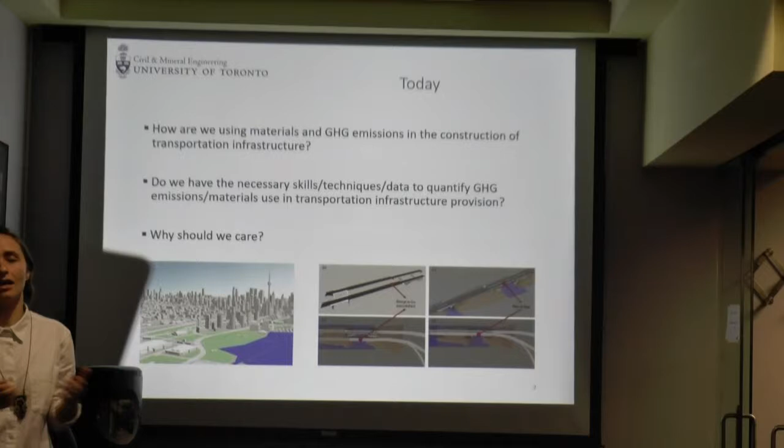I'll answer it in a useful way. And then at the end, in case it wasn't obvious through the presentation, I'll go over why should we care, and especially why should you care as transportation engineers.

Your computer is blocking the screen a little bit. Down, there you go, yes. Okay, I'm a little bit worried about dropping your computer off the edge of the table.

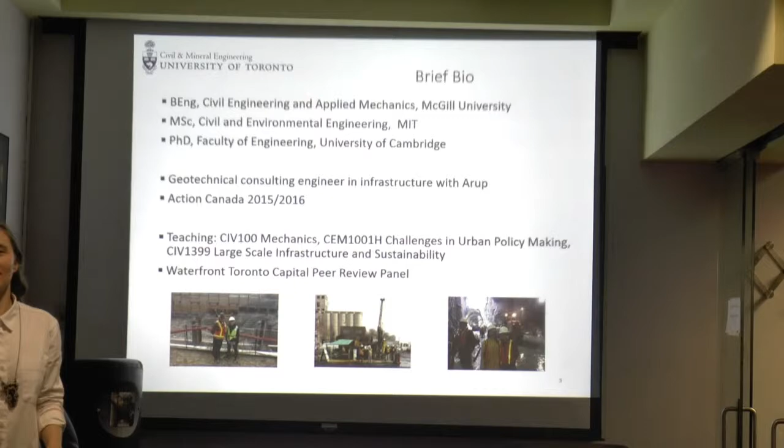So for those of you who don't know me, like Laura said, I'm a professor here in civil and mineral engineering, and I'm not a transportation engineer. I'm a geotechnical engineer by training, and then later in my career I got into sustainability. When they were hiring me for this job, they said, 'Are you a transportation engineer? Because we have enough of those and we don't want any more.' And I'm not a transportation engineer. I could not run a 4-step model. It would not be useful for that.

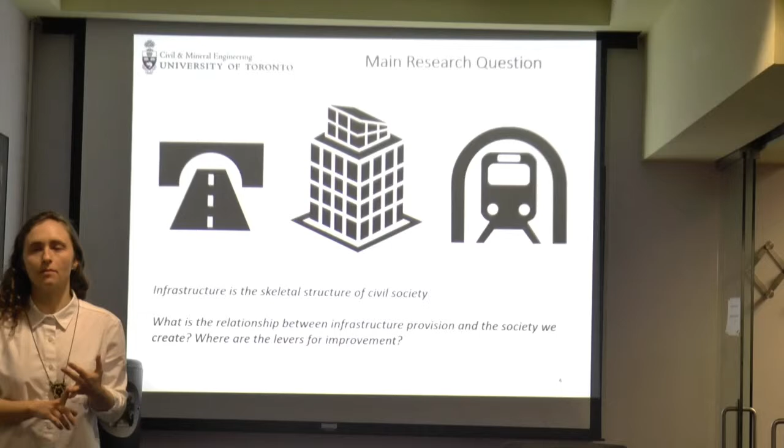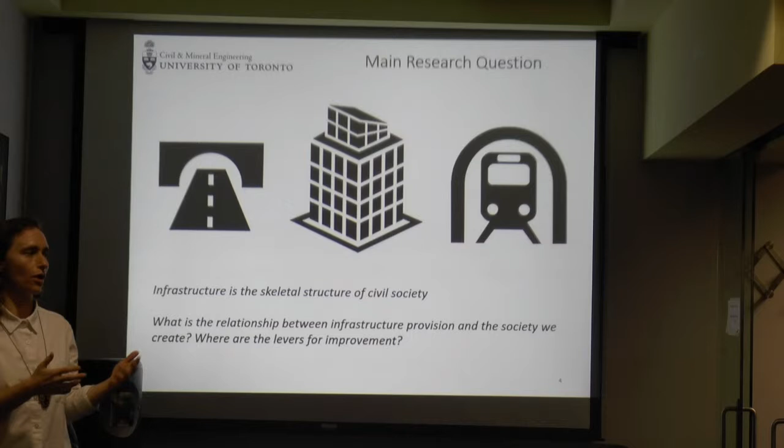But I do a lot of work on transportation infrastructure, because transportation infrastructure is the structure that we put the whole rest of civil society on top of. That leads to my big research question: given that our infrastructure systems are the skeleton of our society, are we planning, building, operating, and maintaining them in a way that aligns with our long-term goals? If we have a goal to reduce greenhouse gas emissions by 80% by 2050, are we building our infrastructure system in a way that gets us there? If we have a goal about equitable access to mobility or accessibility for all of our populace, are we building our infrastructure systems in a way that helps us get there?

Overall in my research, I take an inductive, bottom-up approach, which means I try to gather a bunch of data and learn from what the data tells me to build a larger theory structured on top of that data about the way our infrastructure system works. This means a lot of my research deals with case studies - very specific accounts of what happened in a general case - and then working from there to build bigger theories on top of it.

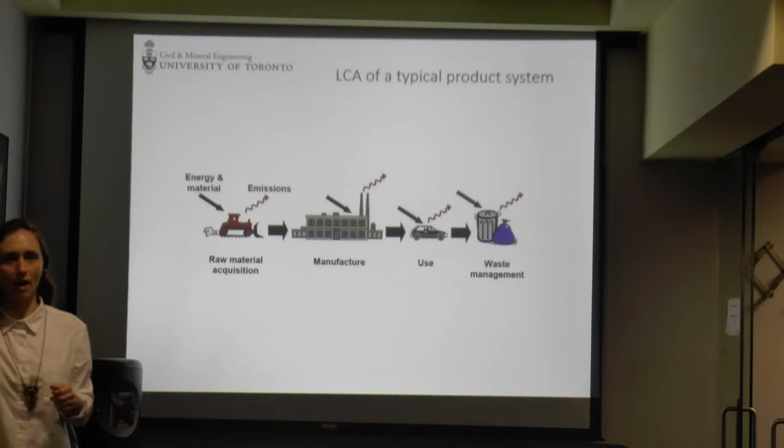I'm going to give you a brief primer on LCA. I know some of you have taken the LCA class here, and for many people it's very familiar, but for others it might be less familiar.

Life cycle assessment is a tool, a thought process for how to think about the overall environmental impact of a product system. One of the main reasons we take into account the full life cycle is so that we don't have burden shifting.

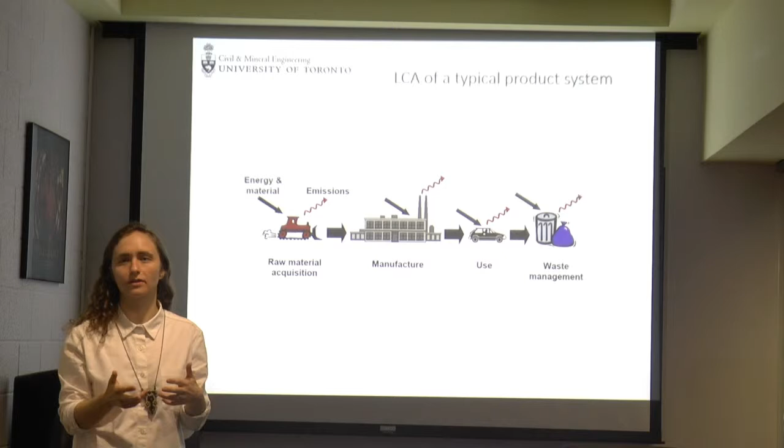If you think about natural gas, for instance, you've probably heard that it's fairly low in greenhouse gas emissions when you burn it. But there are lots of processes involved in getting the natural gas out of the ground that can release a lot of methane and have a lot of environmental impacts. So when you take a life cycle assessment, you look at getting it out of the ground as well as burning it, and you come up with a slightly different perception of that fuel than if you had just looked at the operation phase.

So this is what life cycle assessment is working to get us to do. It has 4 main stages: getting the raw materials, manufacturing it into a product, using the product, and then disposing of the product at the end of its life.

Life cycle assessment in North America can be traced back to consumer products. It started with Coca-Cola: is it better to have plastic Coca-Cola or glass Coca-Cola? If you look into the impact of the materials and the shipping overall, you have to take into account the weight. You come up with different ideas about what's best depending on which life cycles you include and which ones you don't.

This has been expanded over time to bigger and bigger systems, all the way since the 70s, but a lot in the last 20 years, has been used for built environment products like buildings. And when you're looking at a building, you're looking at slightly different life cycles.

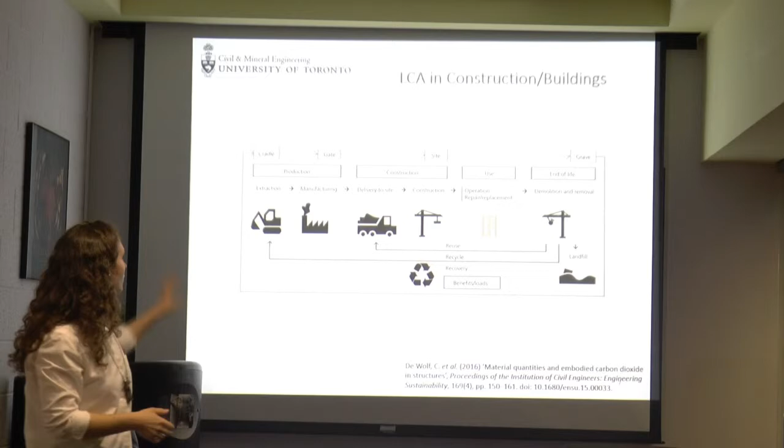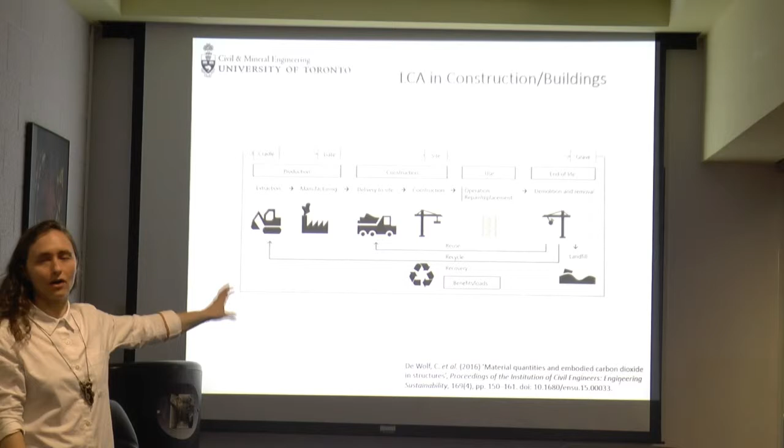You have extraction and manufacturing, you have delivery to site and construction on site, which is sort of more manufacturing even once you pass the original manufacturing materials. Then you have operation, repair, and replacement, because buildings have 20, 50, or if you live in Europe, 400-year lifespans. And then how do you get rid of the building at the end of its lifespan? This is the way people have been thinking about built environment LCA for a long time.

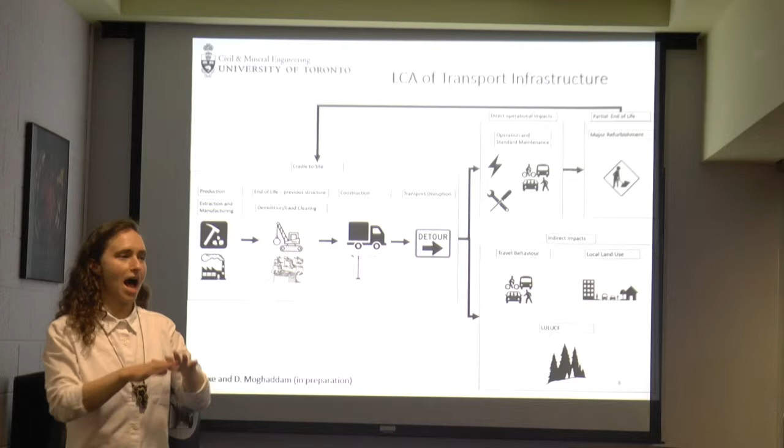But when we start to think about transportation life cycles, because of that nature of transportation as the baseline on which we build society, and also because the nature of transportation projects is really, really big...

Even a massive building is not going to have an influence much larger than a couple blocks around it. A transportation system can go all the way through a city, it can go between cities, you can have a highway that goes for hundreds, if not thousands of kilometers, and so the scale of impact we're having is a lot larger. And so we have the impact of the whole construction, so we have to get the materials out of the ground, we have to clear wherever we want to build the transportation infrastructure, and we have to deal with all the transportation disruption while we're building the infrastructure.

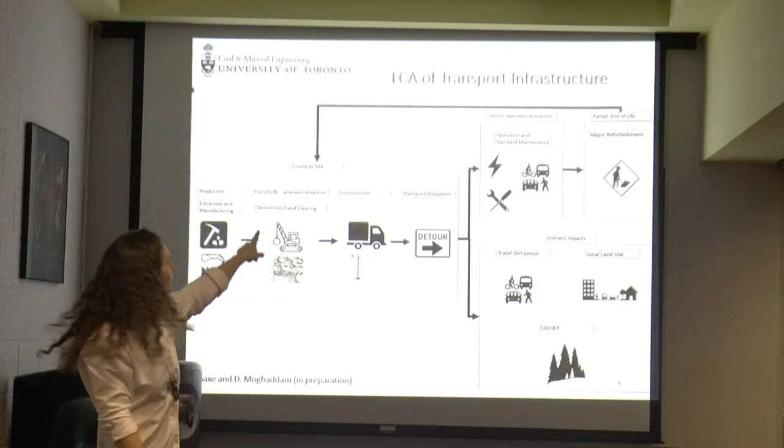And then you go up to the things we tend to think about the most often in the little box over here. You have to operate the infrastructure, you've got to make sure the roads stay smooth, you've got to keep the trains running, you've got to run the cars and the trains. And then at the same time, you have all of the important indirect or induced impacts of induced demand on travel behavior, transport land use connections, the way in which our transport system influences or not the protection of natural land.

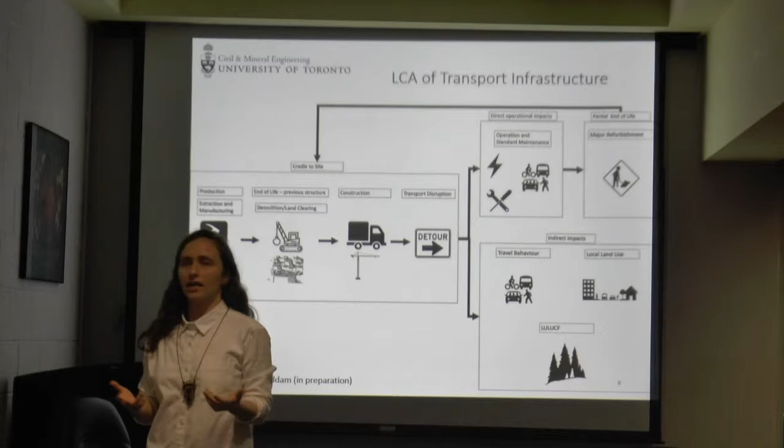And then eventually you get to a sort of end of life where we start taking our transportation system apart in major ways, but mostly to rebuild it, right? The oldest metro systems in the world are still running. Roman roads, we still use them, right? The major roads in Toronto have been here since the beginning. We don't tend to end of life our transportation infrastructure, so it doesn't fit into the LCA framework in the same way as many other consumer products.

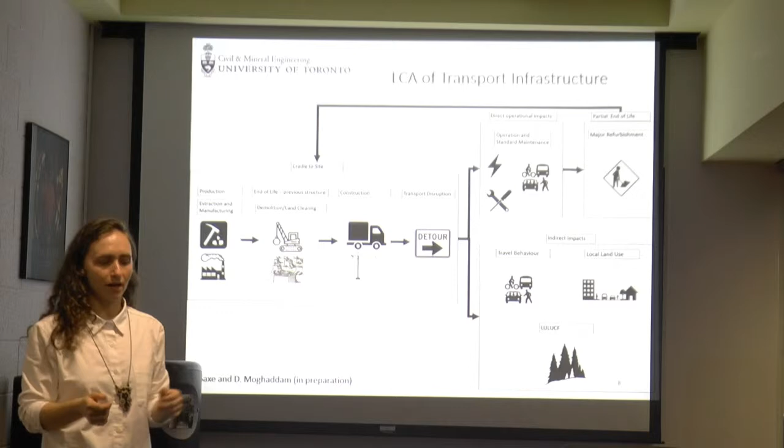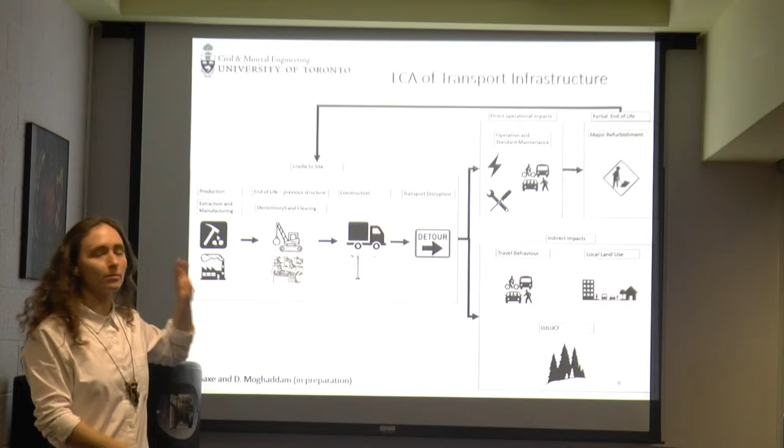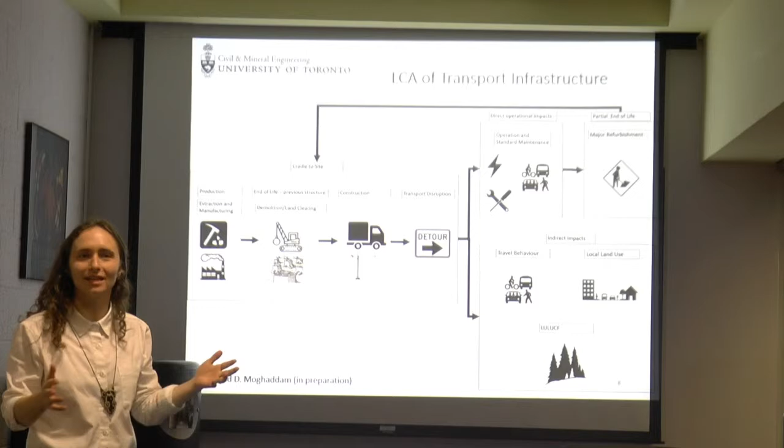And so most of what I'm going to be talking about today is in this space, in part because this space and some of this space is pretty well covered by transportation engineering. But I think it's important that transportation engineers and all of us as we think about planning our infrastructure system have a better ability to think about the whole space as we work towards long-term goals like accessibility for all, not melting the planet, and basic things that we're working towards.

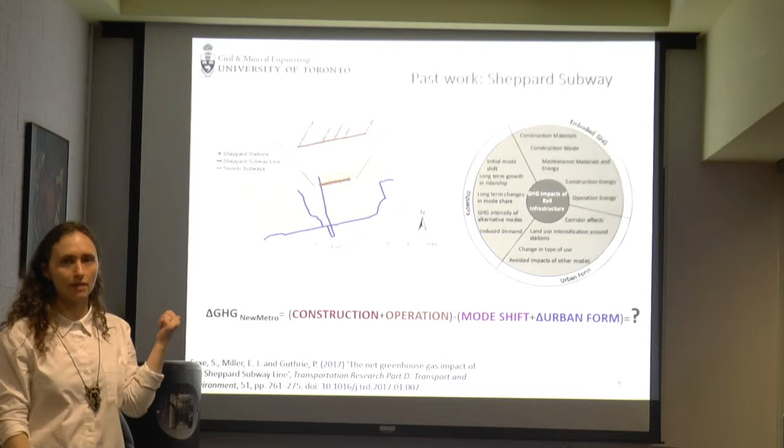So some of you will have seen this before, especially if you were here 4 years ago when I gave my last presentation in the seminar. And so in my past work, I've tried to pick off pieces of this bigger problem and think about what the overall impact is of our infrastructure, in this case, particularly on greenhouse gas emissions. So this is work that came out of my PhD looking at what's the net greenhouse gas emission of the Sheppard subway. And for that, I looked at what it took to build the subway, but also its impact on long-term travel behavior and its impact on land use change.

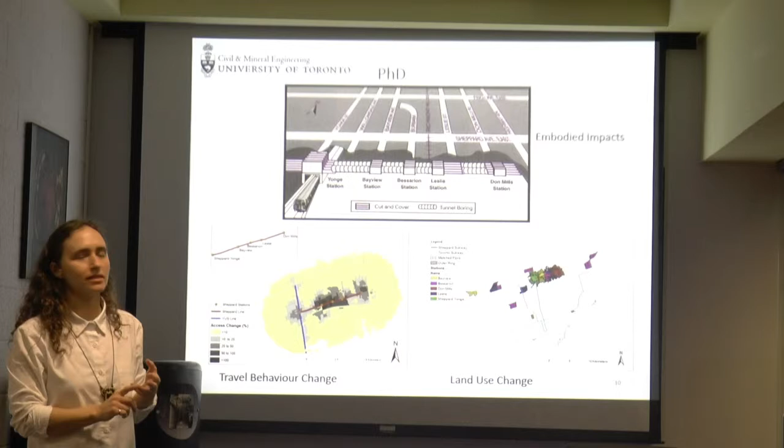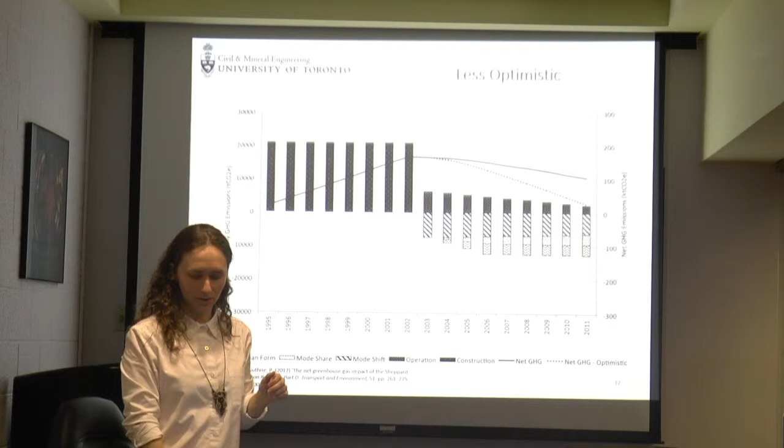And when we put them all together, I found that overall, you get a big buildup of greenhouse gas emissions during construction, and then you start to recover emissions as people change travel behavior and as land use changes over time. But this was taking the optimistic approach. This was taking a less optimistic approach to induced demand and land use change, and this was taking the least optimistic approach. And if we want to make decisions about how to build infrastructure and what we should be doing with it, this range of it pays back in 12 years to it never pays back is too big. This work, I think, was useful for bringing up questions, but on actual guidelines and numbers, the ranges were all over the place, and you could make a reasonable argument in either direction.

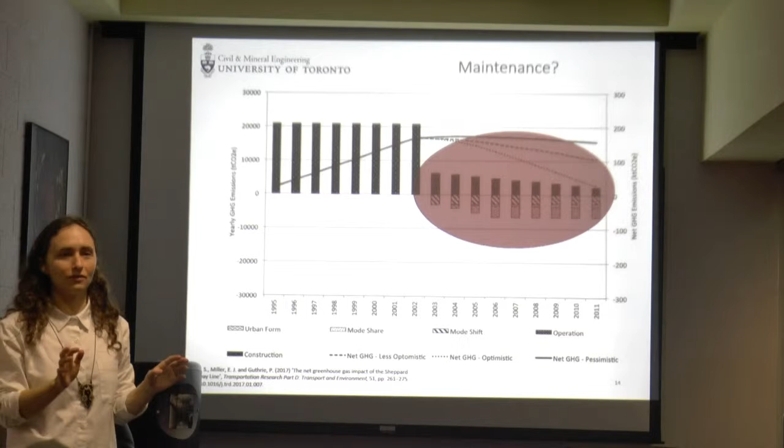So in the time since then, I've been looking at, well, which parts of this data were really weak? And one of the things that you'll see over here is there was no maintenance impact on the infrastructure. I believed in my earlier work that once you build the infrastructure, it keeps going forever without needing any further inputs. What you're seeing there is the impact of electricity, and the reason it goes down is because the change in electricity mix in Ontario over that time.

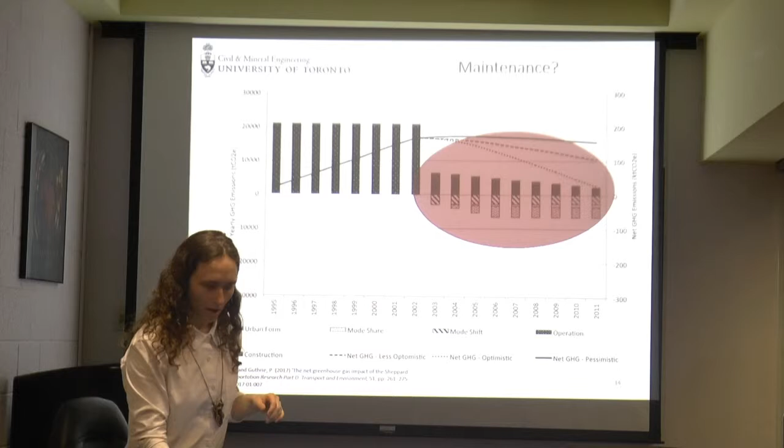And then another big thing that was missing from our understanding was what exactly was going on in the construction phase. It's a big part of the emissions. It has the major impact on our payback, because if it's bigger, we have more to pay back. If it's smaller, we have less to pay back. But the data that was available in our understanding at the time I was doing my PhD was pretty thin. In part because most of this data is proprietary, and because of the nature of the construction industry, it tends to be held by many different people. And so getting even a basic number like how much concrete did we put in this building or how much concrete did we put in the subway is actually surprisingly difficult.

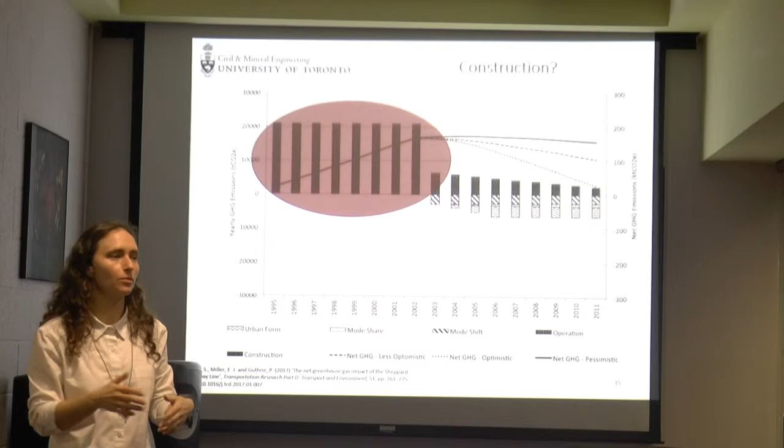So going forward, we started to ask a couple other questions, and one of them was, do we have enough information about the rail network as a whole, or the way in which we build rail infrastructure, to get an understanding of what the greenhouse gas impact of rail infrastructure is so that we can use this in planning?

And when I started to do this work, I really thought the answer was going to be yes. It had been about a decade since some of the key seminal work in this space. A lot of people have been talking about it. I'd contributed to it. I felt we were getting fairly to the end.

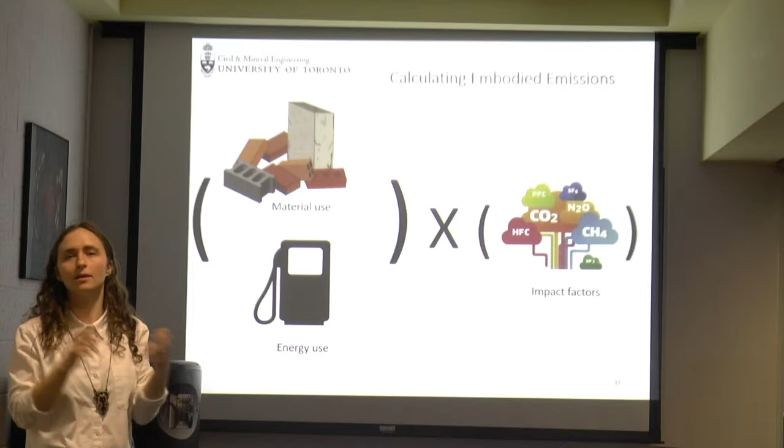So one of the things that we need to do to calculate the embodied emissions of building infrastructure, and this is the cradle to place part, it's the part of the life cycle that's just until the infrastructure opens and we start using it, was we need to know how much materials are involved, we need to know how much fuel is involved, and we need to know what the intensity of that fuel or materials are. Like, what's the impact for the environment of using 1 meter cubed of concrete?

And so in some early research, when I first started here, we picked off, well, let's look at the maintenance. That was one of the two things that were missing. We know we use a lot of materials in maintenance, or at least we think we probably do, and it hadn't been factored into most of the work that had gone into the life cycle.

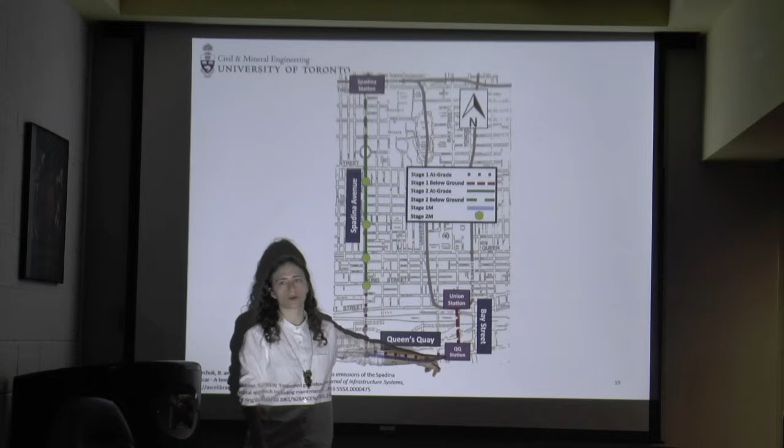And so we picked up the Spadina streetcar as a case study, and started looking at the development of the Spadina streetcar over time. And so we now know the Spadina streetcar as it goes from Union Station, it comes out of Queens Quay, comes out from underground, so this part's underground, comes across the waterfront, and then goes up and goes underground again to go into Spadina Station.

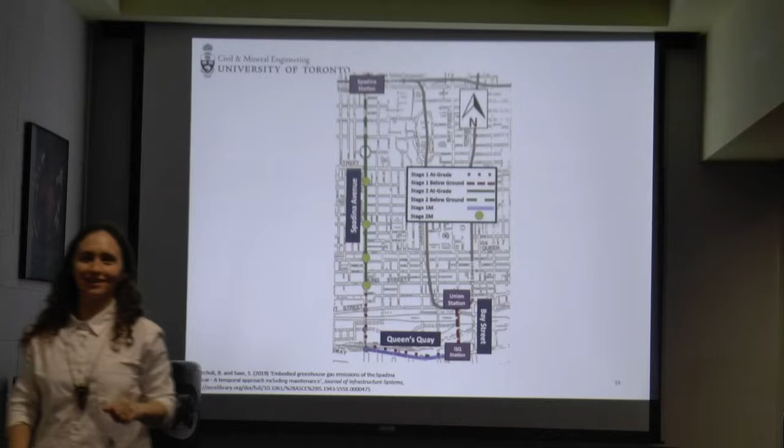Somebody poke Matt, he's struggling. Jet lag. I believe you.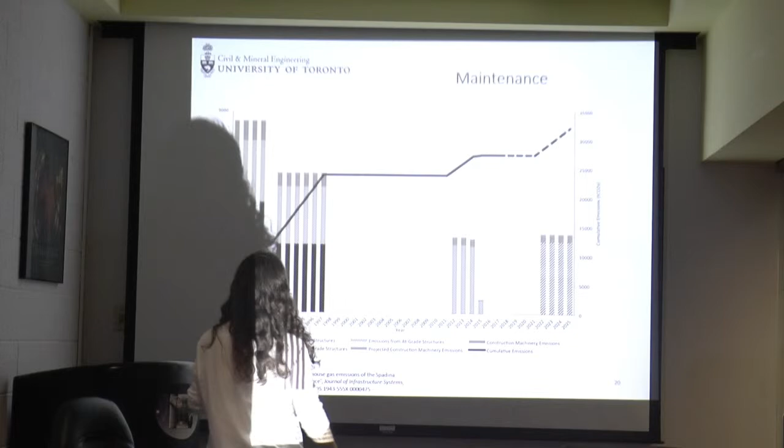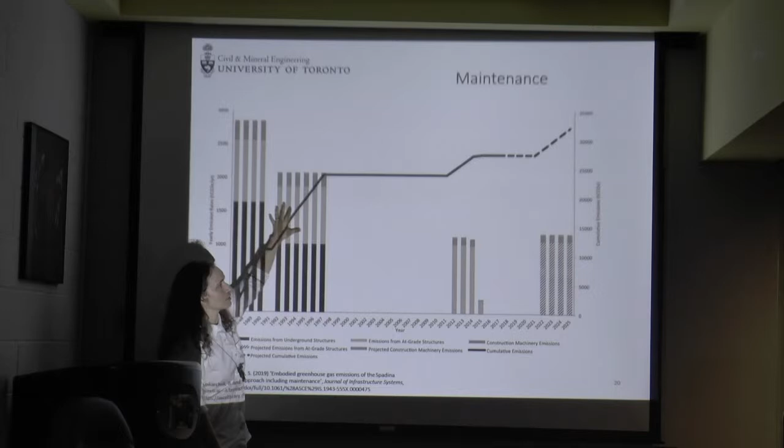And so we started to look at, well, how had the greenhouse gas emissions built up over time through the various stages of construction, and what had maintenance had to do with it. And so this is what we found overall. We're seeing here in black the underground sections. We didn't find any evidence of underground maintenance, but we found a lot of evidence for the gray sections, which is the above ground. So this was the original construction, and then this was maintenance later.

And what we found is that the above ground sections of Spadina have been built twice. And that's kind of surprising. The line hasn't been around for that long. It started construction in the late 80s. But the entire line by the end of our case study will have been built twice, and this is just major maintenance. So what does that do for the environmental payback of that line?

Well, if it took 20 years for it to pay back the first time, and then we built it again, and it takes another 20 years, it means we're going to struggle to benefit from the potential savings of the system itself. And so why was this taking so long? Well, there were a couple things. When they first built the Spadina line, they wanted to close the road as little as possible. And so they built it really quickly, which had a durability impact.

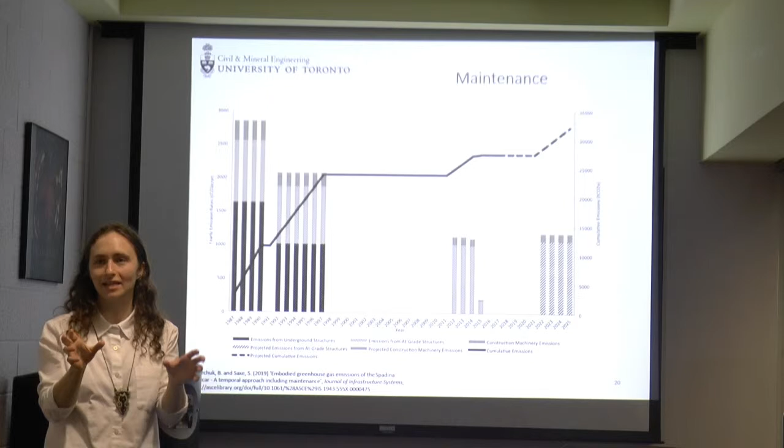So when they went to do maintenance, they thought they were only going to have to maintain the top concrete layer, where vibrations from the streetcar had basically meant that the rail lines were not properly encased in the concrete anymore. They thought they were just going to have to do the top. They found they had to do the full depth, which required both a lot more time in the construction or rehab process when they had to redo it, but also a lot more materials.

And so there's a lesson here about if we're going to do it, let's take the time to do it right, and that's hard. Nobody likes it when roads are shut down. Nobody likes it when transport is out of service. But there had been a challenge the first time around because of doing it quickly that had long-term impacts.

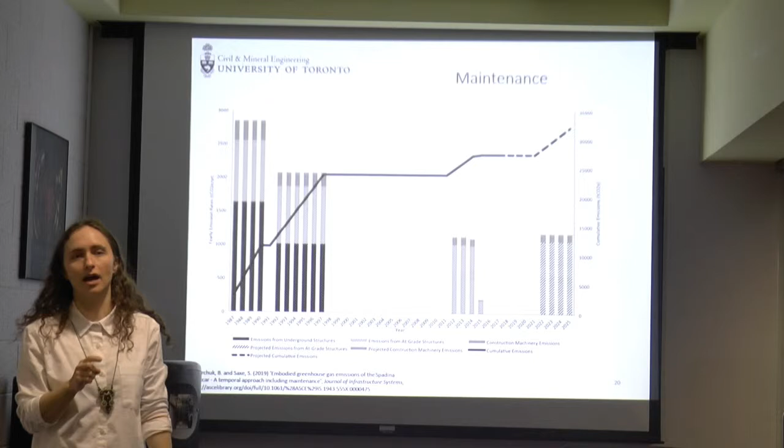One thing I'm going to say right now is I do my research on rail infrastructure because I like rail infrastructure. This applies much, much worse and much more to roads. So nobody should come out of this with a message that rail infrastructure is bad and we shouldn't do it.

It's just a framework for thinking about infrastructure. Roads require a huge amount of maintenance as well, and they have all of the cars that go on them. Okay. So going back to rail, we've taken a little bit of a look at maintenance. Now let's look at all of the literature that had been done in the rail space.

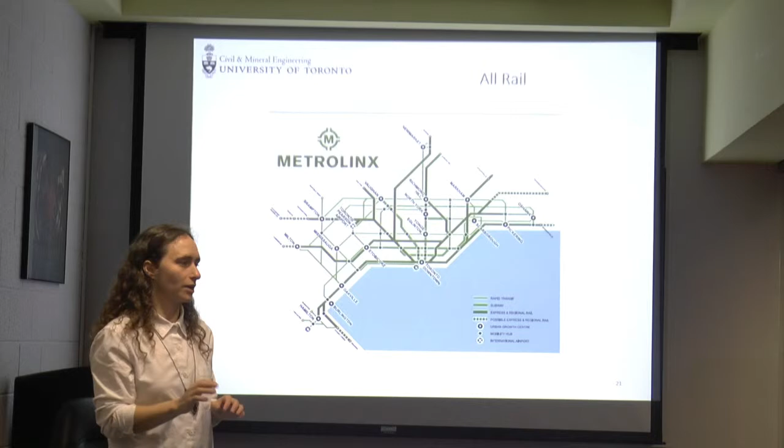We started doing a lit review of all of the literature that had looked at the embodied emissions of rail of all types, of light rail, of heavy rail, of metro rail. And we had a couple of research questions going in. One was, where in the world has this research been done? There was a lot of conversation going on, but it was a little bit unclear from the way we were all talking, is this pertinent to everywhere in the world, or is it all just coming from California?

What were the main factors influencing the greenhouse gas emissions of our rail infrastructure? Are they things that we can control in planning or control in design? How quickly is our infrastructure paying back its greenhouse gas emissions? And do we know enough from what's already existing that we could make useful models for planning in the future?

But the other questions were a little bit harder to answer. When we started looking, we found that while there had been 23 papers in this space, most of them had only looked at embodied emissions as part of what they were doing. There were only 4 papers that had made embodied emissions their main focus. And as we all know from when you do papers, if you're doing 6 different things at once, you do each of them with a little bit less detail than if you were only focusing on one thing. So there was a lot less detail out there than we had originally expected.

And everybody had done this in different ways. People had taken different boundaries, they had taken different life cycle assessment approaches, they had done it at different stages of construction. And so there was a huge amount of diversity within the data set, and much more than certainly I expected going in.

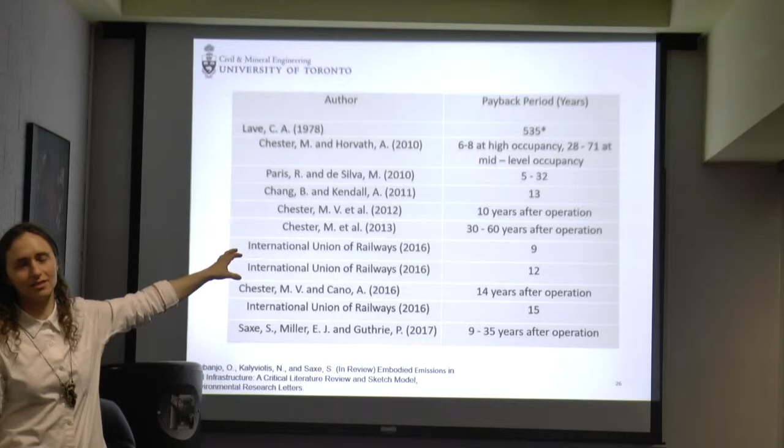When we took a look at payback periods, again, there was a pretty big range. The one at the top from the 70s should be discounted because it was a completely different energy system at the time. And what we were finding in general is that most people were finding it takes decades to pay back the upfront cost of building rail infrastructure, meaning there is space as we build and plan to reduce the material and greenhouse gas investment so that we can get better long-term payback.

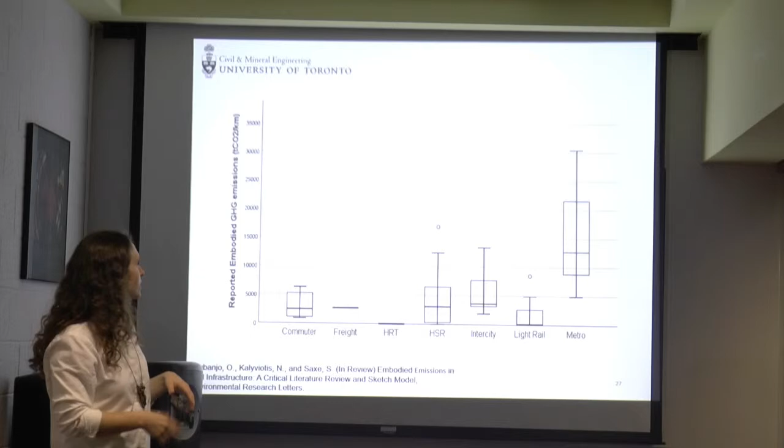And did we have enough information to make a sketch tool? Could we say, if you're choosing light rail versus heavy rail, this is how much greenhouse gas emissions you should plan per kilometer? What we found is that there was a very, very large range in the published work. As you can see, for metro rail, it ranges from 5,000 greenhouse gas emissions per kilometer to 30,000.

So you can say, okay, well, this is a huge range, maybe not that useful, but one of the things to notice is that light rail, intercity rail, metro rail are not necessarily descriptors of the type of infrastructure you run on them. They're a label that we give to our infrastructure, and sometimes they tell us a lot about the rail gauge or maybe about the vehicle itself. But are you building at grade, are you building in a tunnel? That wasn't included in these names.

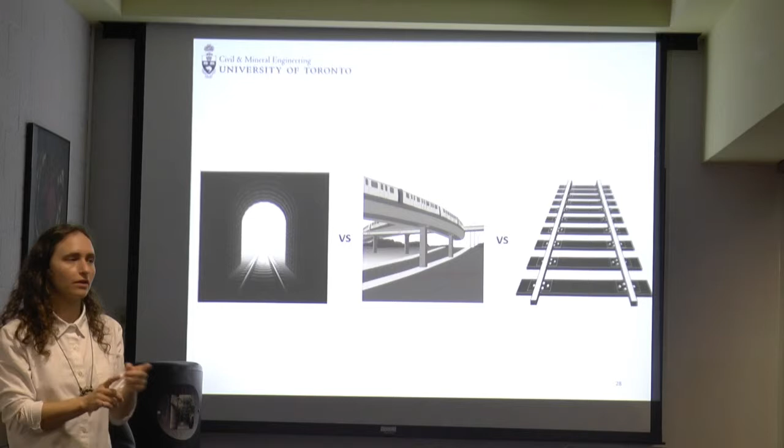So if we backed off and put all of the infrastructure, whether it's called light rail or heavy rail or high-speed rail, into the same pile, and looked at the need for tunneling versus at-grade versus elevated structures, could we reduce some of the variance on all of these data? And what we found was that, in general, tunneling is about 27 times more greenhouse gas intensive than building at grade. And for elevated structures, there's less data, but about 6 times as much.

And if we use that to normalize the emissions, you find a much smaller range of emissions for each type of rail. And it led us to, for an equivalent at-grade kilometer, you could make a sketch tool that said it was a little bit under 1,000 tons of CO2 per kilometer, if you look at everything all in.

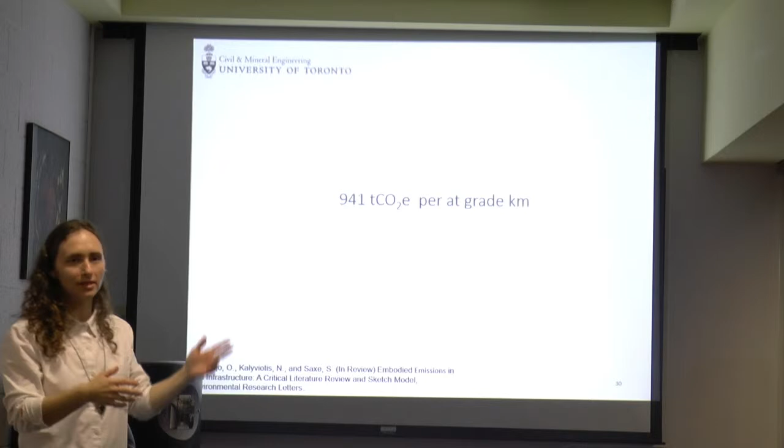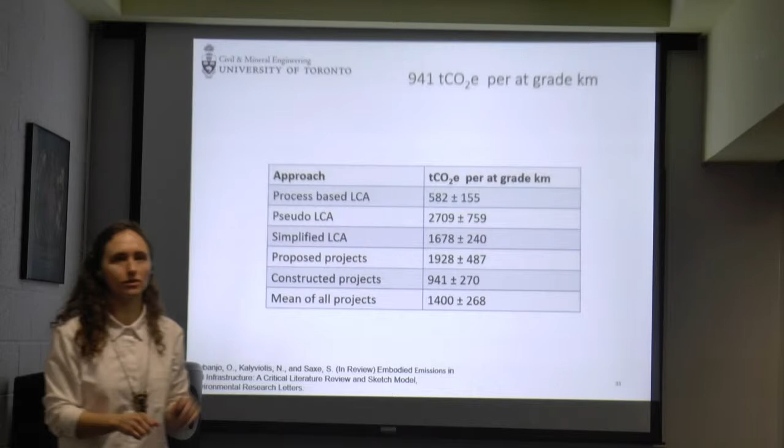So we can say, okay, great, we've come up with a sketch tool. You should normalize per at-grade kilometer, multiply by 27 times if it's going to be a tunnel, multiply by 6 times if it's going to be elevated. But to add a little caution, when we grouped on various other parts of the infrastructure, for instance, whether the project was already constructed or planned, there were huge variations in the numbers. So the 941 should definitely be taken with a grain of salt.

So we'll go back to the original research questions, were we able to answer them? So, where in the world? We know most of it is coming from Europe and from North America. So if we're looking at other places, we should probably put some effort into understanding if those places have meaningful construction differences from Europe and North America.

And what are the published payback periods? It looks like we're looking at a decade to decades. Do we have enough information yet to use this in planning? I would say we have enough information for a very sketchy sketch tool, but not enough for detailed planning. One of the things the field needs going forward is a lot more standardization, but also a lot more data from the people who build these systems and plan these systems to allow for better studying and more detailed outcomes.

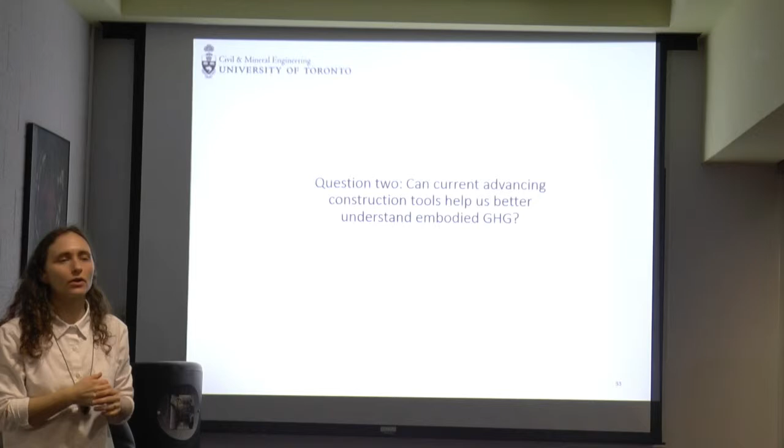And so the next thing I wanted to ask was, okay, it's kind of hard to figure out what's embodied in a construction system. There are challenges with data, there are challenges with boundaries. And there has been challenge with data in this field since the field has existed. It was a challenge for my PhD, it was a challenge for all of the people who came before me, and it's been a challenge in my work my whole career. But there are increasing digitized tools and modern approaches to construction, and maybe we could take a different approach to collecting the data, and it might be easier to get it all together.

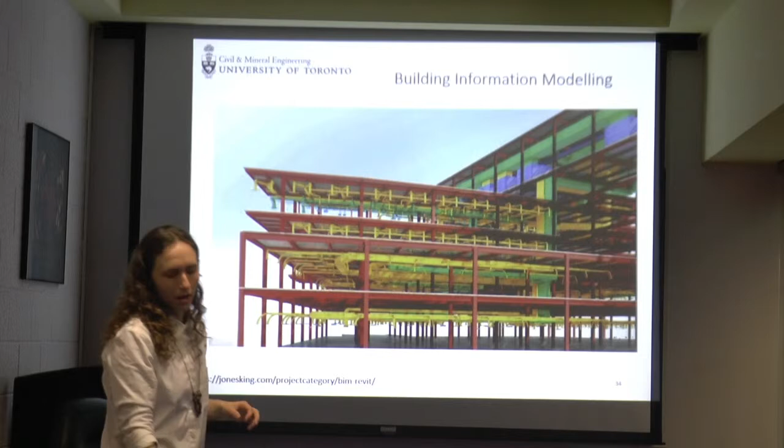One of the things that's becoming bigger and bigger in construction is the use of building information modeling, which is 3D models that represent all of the components that will go into a building and are usually labeled by material. So if you looked at this drawing, the red, which is the steel, would usually be labeled steel with all of its details. The yellow, which looks to me like the plumbing system, would usually be labeled with all of the material details. And so inside a building information model, you can usually just press a button and it gives you all of the material quantities inside the virtual construction you have just made.

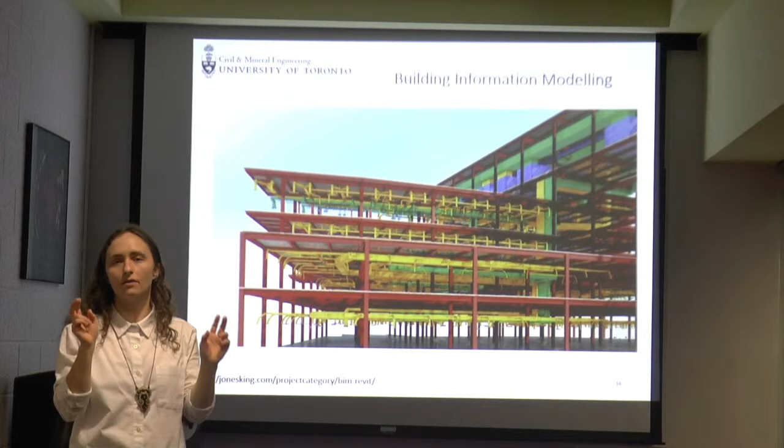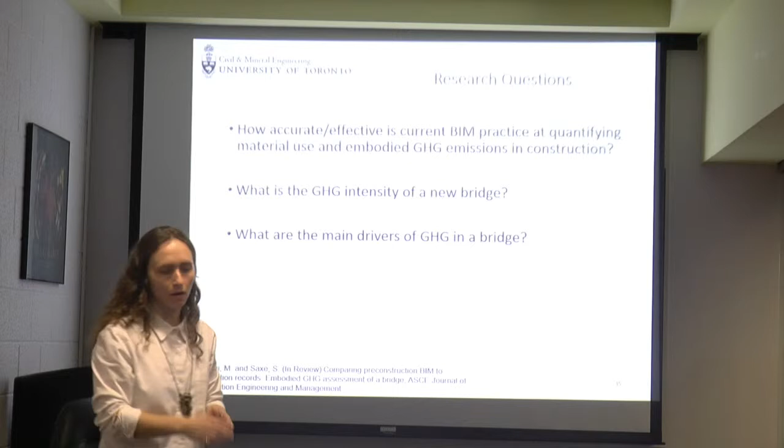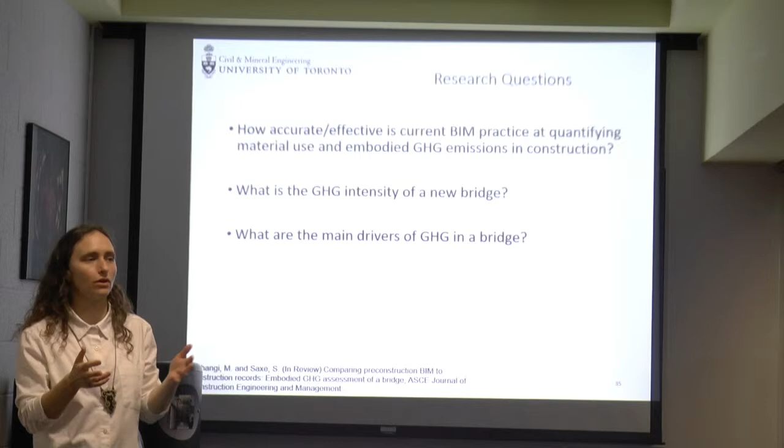And that could be a great way to have a better approach for getting all of the data we need anywhere there is a building information model. So we took another case study, in this case a bridge, and we had a BIM model from before it was built, and also a bunch of details from the construction site of actually measuring how much concrete was used on that site, how much steel was used, how much asphalt was used. And we wanted to take a look and see, between these two sets of data, are we going to get the same information? Is the BIM model as good as having the information from on site, and could it replace the complicated, challenging, proprietary needs to collect all of this data by hand?

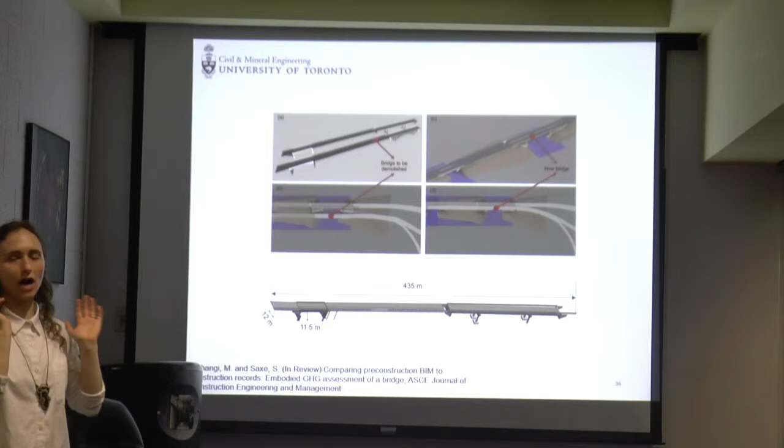When we took a look at a bridge in Ontario, it was originally 2 lanes of traffic that went over 2 bridges and then had an island and went over 2 other bridges. The plan was, between the 2 bridges, to build a new bridge, refurbish one of the original bridges, and take down one of the original lanes. So there were 2 new bridges and 2 bridge refurbishments in the project, and overall it was about 0.5 kilometer long. This is what the Navisworks figures looked like, which was the building information model we were using.

So we looked at the work in 4 different stages. First, just using the BIM as a base case. Second, adjusting the things that were modeled in the BIM to their on-site quantities. So structural steel is modeled in the BIM, but steel reinforcing is not. Some elements, like construction energy, are not modeled in the BIM at all. So first we wanted to adjust the quantities themselves, then add in the impacts of things not included, like rebar in the BIM, and then, in the fourth case, tested the sensitivity of this approach for calculating greenhouse gas emissions to assumed or preliminary intensities assumed for concrete. If we assume concrete has 10 greenhouse gas emissions in it, we know there's a big range in the way concrete is manufactured, and so we needed to test the sensitivity of that 10.

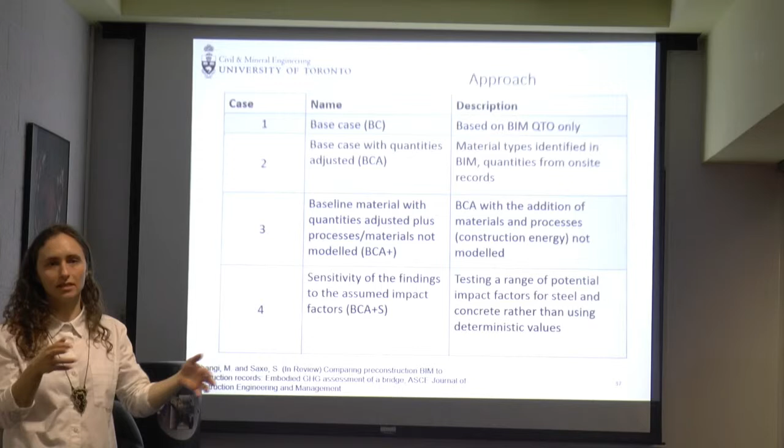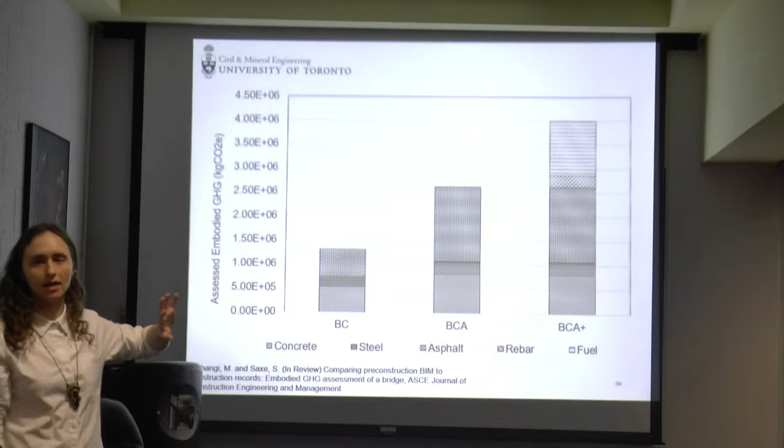These are the range of results we came up with for the first three cases. The BC case is the base case. If we had just done a greenhouse gas accounting based on the BIM, we would have come up with about 1.25 on that scale.

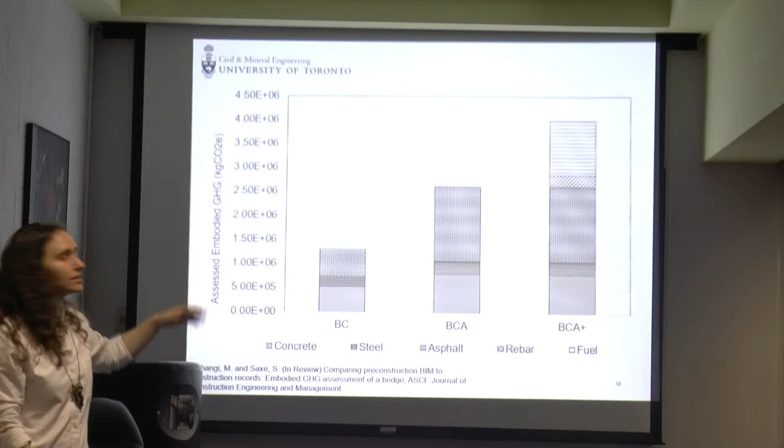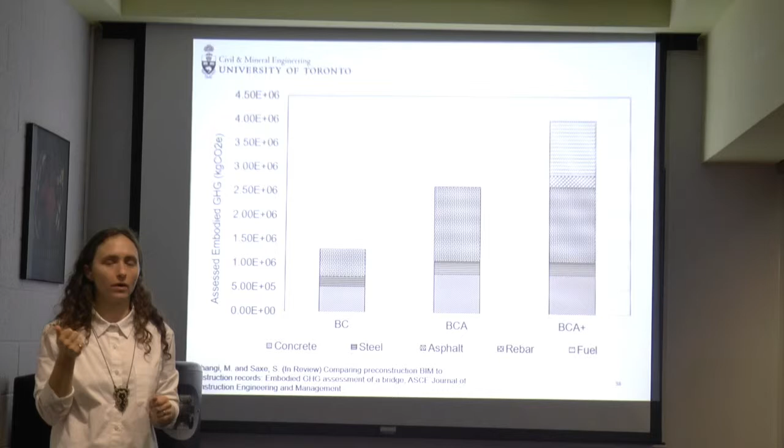When we adjust the materials for what we observed on site, it goes up. When we adjust for adding in the impact of all of the construction materials on site, it goes up again. The difference between the BIM model itself and what was measured on the construction site was about 208%, which is massive. That's not a normal error bar. So what that means is BIM as it's currently being drawn is not going to be accurate enough for greenhouse gas accounting based on this case study.

When we look closer to why that's a huge difference, that kind of material difference is going to be showing up in the economic measures of the company that built this. It's not the kind of thing people casually just let slip by.

So when we looked at what the BIM model had said we would need for concrete versus what actually was needed, you find out that for a while it traced really well. The QC/QA quantities were what we had on site, the BIM-based quantities are what we'd expect from the model, and up until about 400 days into the construction project, it was all going along really well.

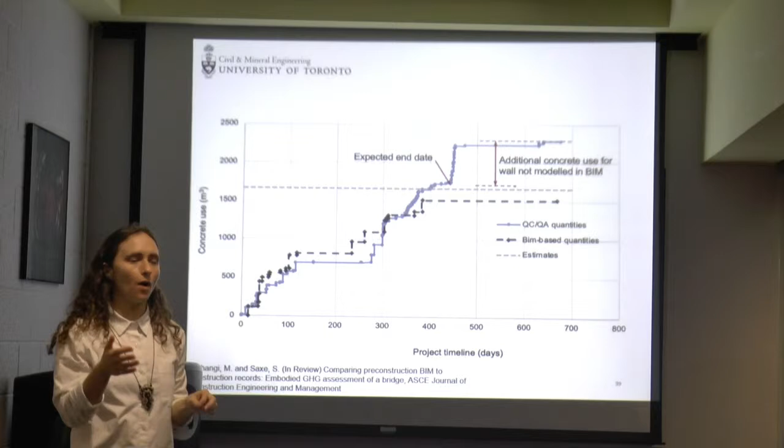But then they had to build something extra that wasn't in the model. The project ended up needing a wall, and that increased the concrete percentage by 50%. You see a similar pattern happen also with the steel—again, they needed to build extra things, so it increased the steel quantity by a lot.

You would say at one level, well, they had to build something extra, maybe this isn't a comment on the BIM, it's just this project had to build something extra. But this project is still ongoing, and we've had the same questions. We were talking to the people who built this. We said, how good are you usually at predicting your overall material use? And they said, we're really, really good.

This is our bread and butter, we do this really well, unless something changes. And we said, well, how often do things change? And they said, all the time, constantly.

If 'all the time, constantly' is true, then these models are not going to capture everything we want if we want to use them as a replacement for measuring detailed things on site. And if we're going to say this bridge or anything we build has an upper bound—this is its allotment, this is its allowed greenhouse gas emissions—that could be a real problem. If you say you're allowed this much and you end up with 300% of that, that's a meaningful difference, especially as we're trying to reduce greenhouse gas emissions aggressively.

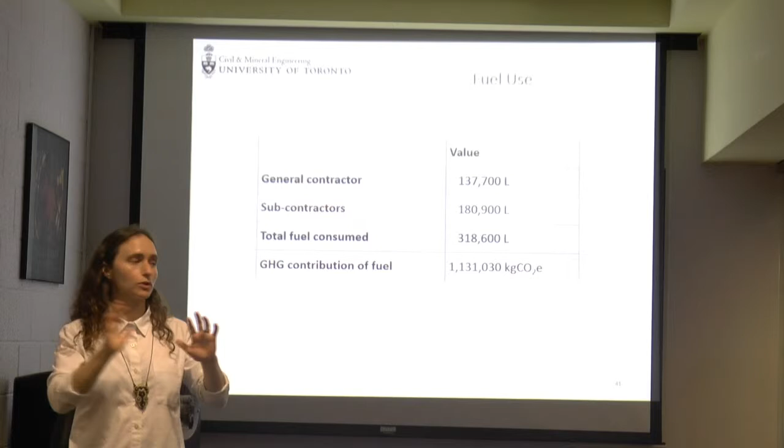Also not included in the BIM is fuel use. The BIM usually draws the physical structure, but the fuel use in this case was about 30% of the overall greenhouse gas emissions. That made a big difference as we finally moved from the BCA case to BCA plus.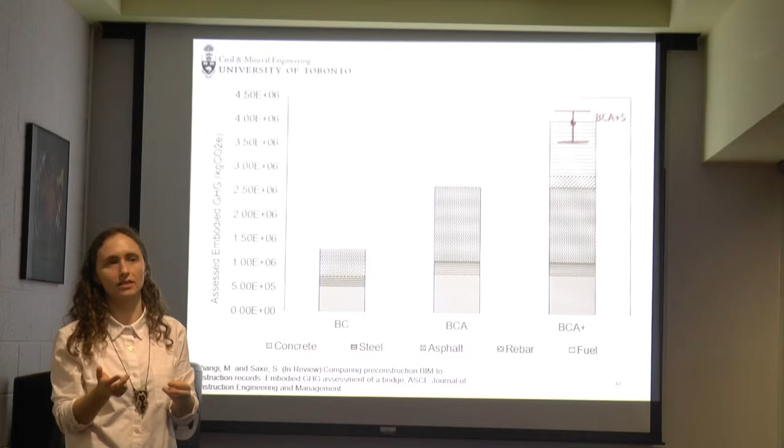You could put fuel use in BIM, and it's something we're talking about—okay, well, how should we use BIM for greenhouse gas emissions? You can model where all of the construction equipment will be. It's just not currently standard practice because you don't necessarily need that for construction, so it's a big question of what are you doing the BIM for, and if you're making it specifically for greenhouse gas emissions, what do you have to do differently?

So you've seen here, I drew the error bars of what happens to this when you change the relative greenhouse gas intensity of concrete or steel. That's a meaningful error, it changes things, but it is much, much less important than getting the quantities right overall. This is important because in the environmental space for construction, the conversation we're having the loudest is what other materials can we use.

Can we use different concrete? Can we use different steel? Can we replace this type of insulation with this type of insulation?

And on many levels, that's easy, right? If we can build exactly the same structures and just switch the materials and they have exactly the same performance, and it's on the material manufacturer, the concrete plant, to just give us a different mix that does exactly the same thing. For the rest of us, that's really easy. We go about business as usual. And I think that's part of the reason this is getting so much attention.

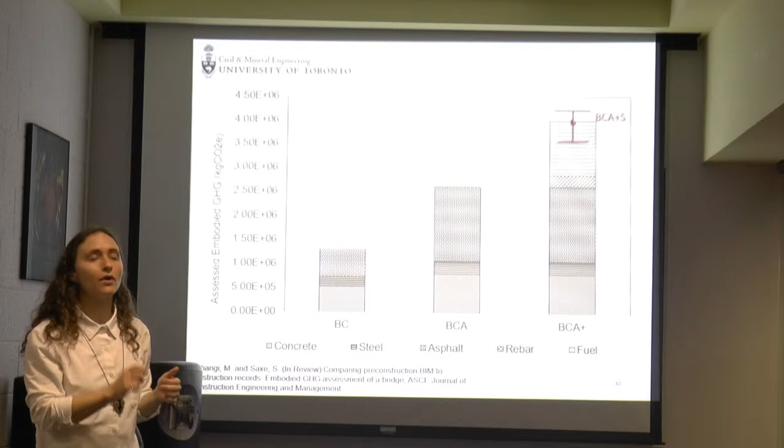But just like with the 3 R's, right? Anyone who grew up in Ontario: reduce, reuse, recycle. If we can reduce the materials we're using up front, no matter what their greenhouse gas intensity, the overall impact will be lower, and it's not as much part of the conversation.

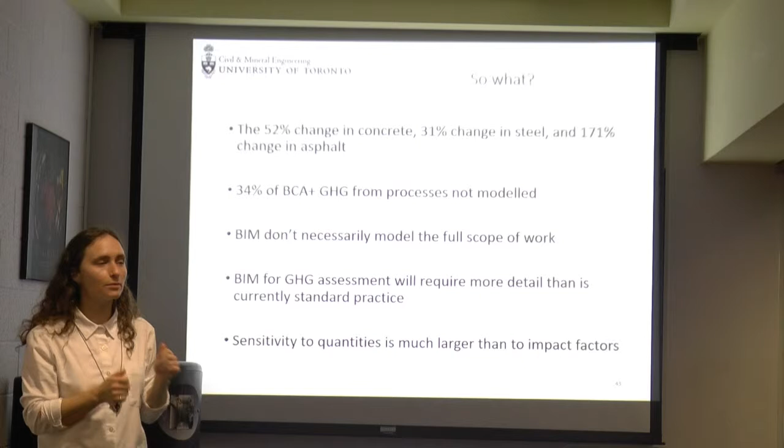So what we found overall was that there was a major difference, that the fuel itself is really important, and that this has meaningful lessons for how we use BIM for LCA. Absolutely, BIM could do it. We would just have to approach it in a very different way than is currently standard practice.

So I've been spending a lot of years doing specific case studies, and that's useful, right? One bridge is useful, but you could easily say, well, that was one case study. Does it apply to other case studies? Maybe only that case study has to build an extra wall and nobody else ever does. And I agree with that question.

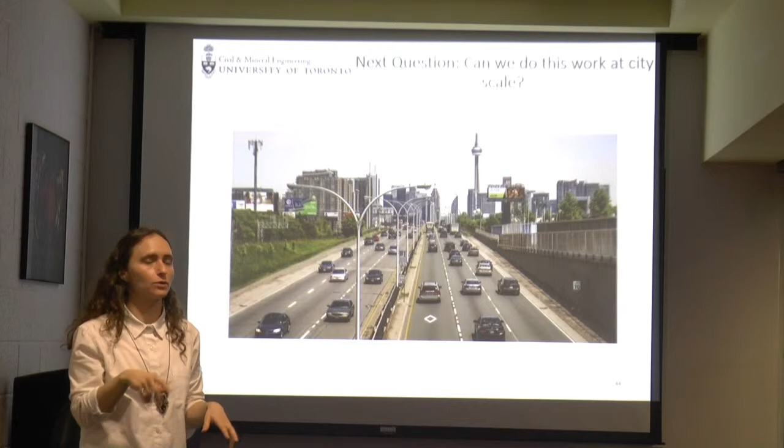So where I've come to recently is we can do this for individual buildings. We can do it for individual roads. We can do it for individual subways. Why don't we do it for the whole city, one building at a time? There's 400,000 buildings in the city, so it may take a little while.

And so the research questions I'm looking at right now at the city scale are: how much material use are we using in the city? Where are we using it? And is there an optimal urban form? Is there an optimal way we could design the city that would provide a reasonable quality of life, but also reduce our overall material use, or at least our per capita material use, and associated environmental impacts?

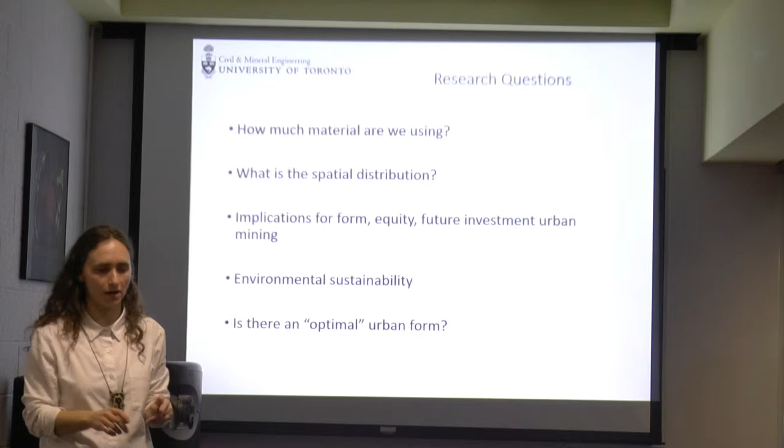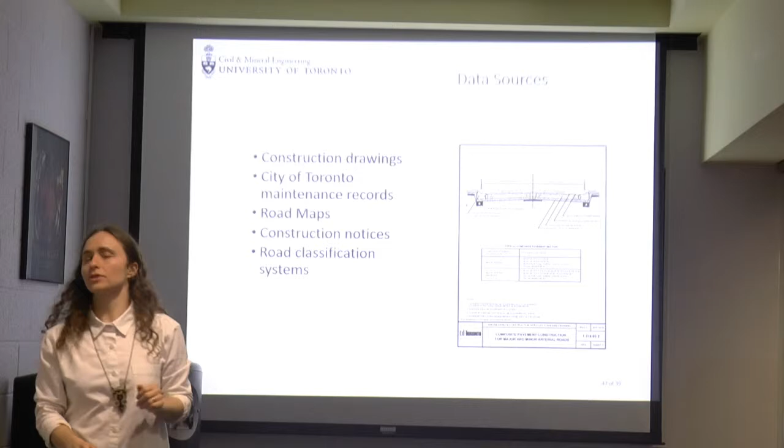So this work is ongoing. I'm just going to show you where we started. In case you don't know Toronto, this is Toronto. We started with the roads first because we could get this data mostly publicly available.

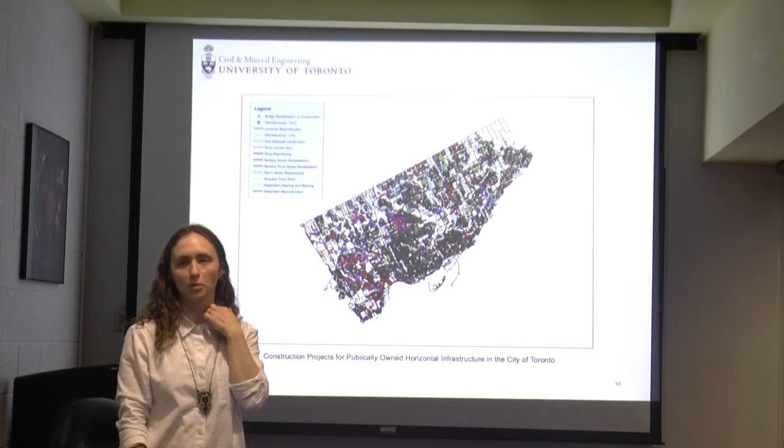And so we want to figure out what is the material in all of the roads. Available on the City of Toronto's website is our construction standards, so we can look at how much subbase, how much concrete, how much aggregate we have. We also got a map of all of the roads from the city. And then one of my students went through all of the construction notices released over a 2-year period on the City of Toronto website and mapped every piece of maintenance being done in the city.

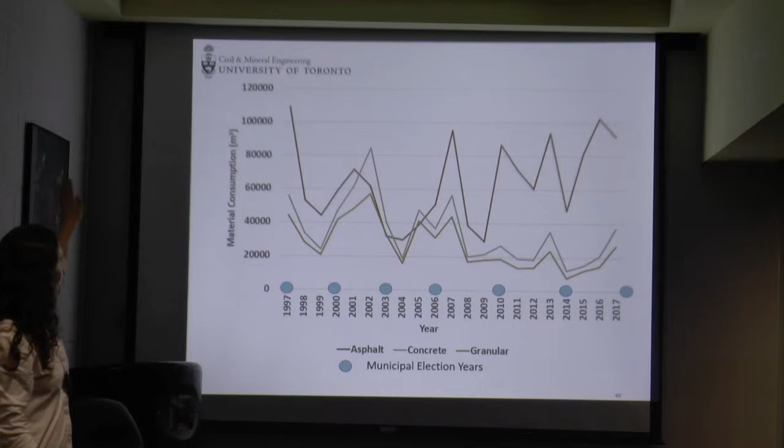And when we took a look at, over time, how much material is in the City of Toronto, both the stocks and flows, how much material is on our roads, and how is it changing over time. The first time we looked at it, in 1997 we put in about 110,000 meters cubed of asphalt into the city, and it goes up and down with huge variation.

We thought maybe this is election cycles, where we build a lot of new roads right before the election, but actually we found that until maybe recently, that's not lining up. So it's a little bit unclear why there are such large variations, but we're seeing over time that between 1% and 5% of the city's entire road stock and materials is turning over every year.

And so you could ask, is that fast enough? If it's 1%, we're looking at rebuilding our whole road system every 100 years. If it's 5%, it's every 20 years, which is closer to what we've been told is an expected lifespan for a road. So this work is currently ongoing to expand from roads to everything else.

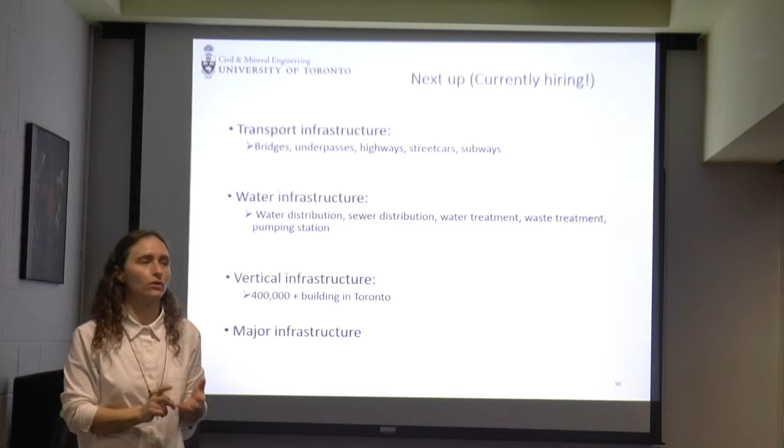And so why care, right? This is probably not what normally goes on in these lectures.

People are usually talking about more traditional transportation engineering, so why should all of you care about this construction life cycle assessment stuff? I think you should care because it's interesting, but also because of the way the transportation system is going. If we reach the utopia transportation system currently promised to us, where it's all autonomous, electric, and shared, the importance for the overall impact—in terms of costs, social outcomes, and especially the environment—is going to be heavily related to what infrastructure we're building to maintain these transportation systems.

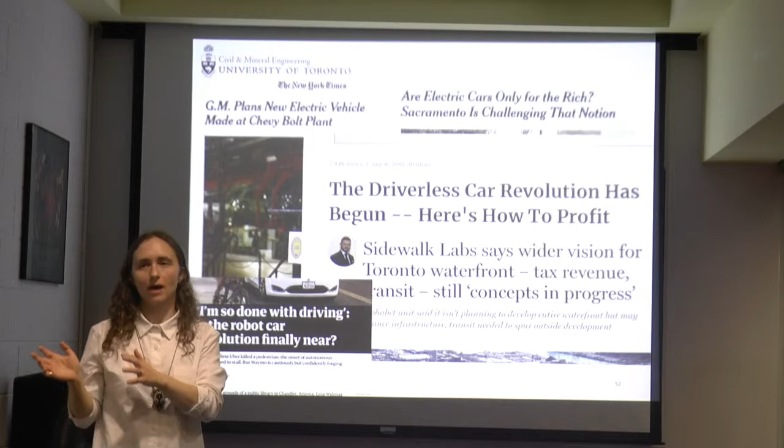If the cars are clean and everyone's sharing them and they have no impact themselves, then the impact is what infrastructure do we need for that system, and what impact is it having on the way we're building our built world. And I'm sure most of you have seen this picture.

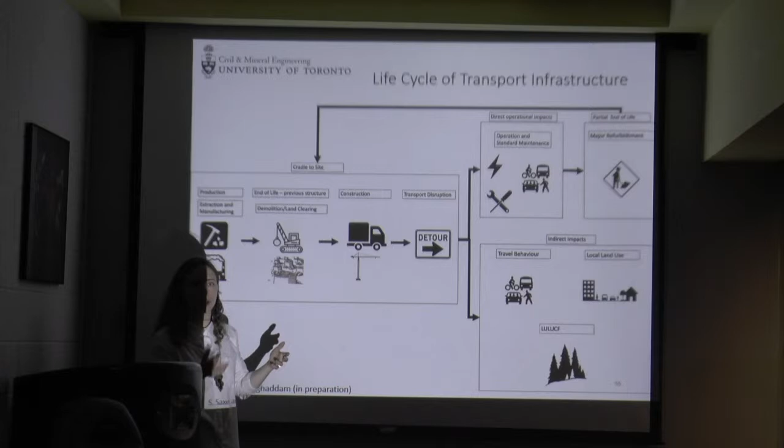But when we think about that, it takes us back to the original life cycle framing, right? If the impacts of this part are all going to go away, but it's going to demand more land use, more sprawl, more conversion of our forestry to suburbs and roads, and require a huge amount of construction and operation, and maybe more input into our infrastructure system so the autonomous cars can navigate it. And we also have to keep maintaining the infrastructure system over time. Those are big questions that transportation engineers should be thinking about.

It's one thing to make an autonomous system work, to make it safe, and to make sure all of the cars can get by. But I challenge you as transportation engineers who will be guiding this transition to also think about what the infrastructure implications of all of these choices are. How much materials does that mean in a resource-constrained world? What are the environmental impacts of that? And what impact is this also going to have on our land use system?

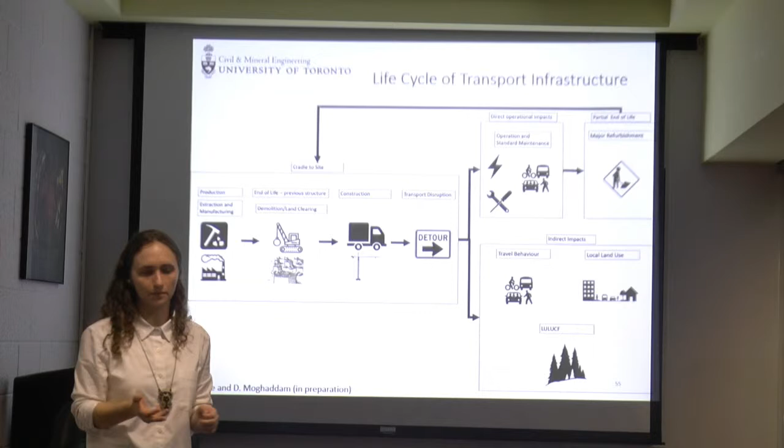So thank you very much to all of the people who did the detailed work that leads up to this, many of whom are in this room. And that's it from me. I'll take any questions.

Let's say with the Spadina streetcar—because you have the Spadina streetcar in place of a laneway or a couple lanes of roadway—do you include in the benefits part of the equation that you don't have to maintain those roadways or lanes?

So I never looked at the payback for Spadina, I've only looked at the maintenance cost. Yeah, I think that would be a reasonable thing to include—whether there is any more maintenance than you would have had to do on the roads. Because the question of what is the counterfactual is always really important, and of course, as you get farther away from the moment where you made the change, the counterfactual gets more and more theoretical. So no, I have never included that, in part because I've never calculated payback for Spadina. That was just one paper looking at the maintenance.

In part because someone at the City of Toronto was very cooperative for a few weeks until their boss told them to stop. So for a while I was getting a huge amount of information on that line, and then I got a very polite 'I am no longer allowed to talk to you' email. Yeah, I think it's a reasonable question, but also, what else would we have done with that space? We could have put bike lanes in, we could have ripped it up. But I would strongly argue public transportation is the way we have to go—it's leaps and bounds better than private transportation. But we should still make sure we optimize that system to get the most out of it that we can.